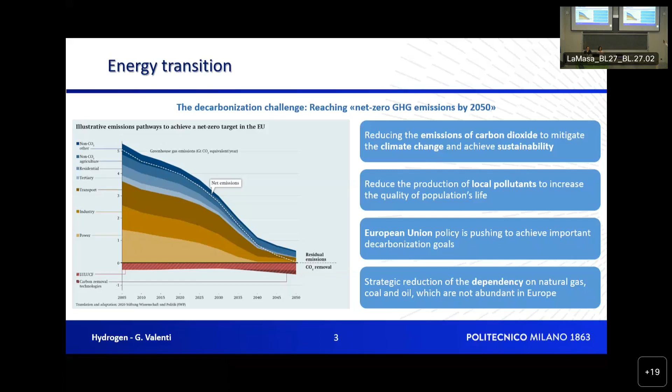I work in the hydrogen sector. I believe hydrogen will be part of our life in 2030, 2040, those years, not tomorrow. However, I strongly believe that the major character of the energy transition is electricity. Electrification of processes is the answer number one to decarbonization. Electricity is produced from renewables readily, use it.

We will see that the energy used in 2050 at the final point of use as electricity will be more than 50%. More than 50% is still not 100%. And why is that? When electricity is produced from renewable sources, it does not necessarily mean it's the moment in which users require it. There is not only an imbalance throughout the day, there is a strong imbalance throughout the seasons.

So because we always are repeating that the electrical infrastructure needs to be balanced, introduce into the grid as much electricity as it is consumed, in order to keep frequency, in order to keep voltage. So I believe in electrification, but can it be a full electrification?

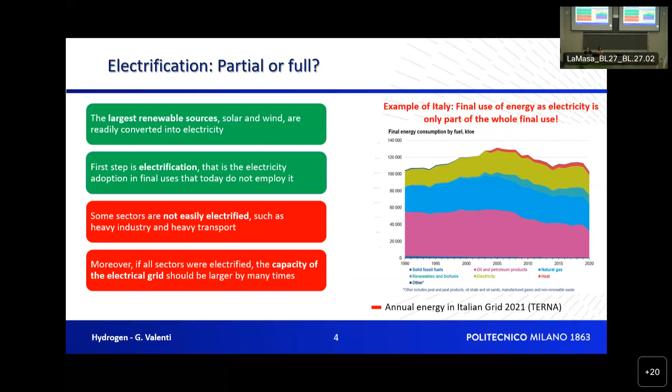Expensive. Transferring energy as a gas, as a gaseous fuel, or even better as a liquid fuel, is way cheaper. Way cheaper. So I believe electricity will be the character number one, hydrogen will be number two.

I don't believe in batteries, not only because of technical issues, but I don't believe in a world only with batteries. I believe in batteries, by the way, but let me complete my sentence. I don't believe in a world with energy stored only in batteries, because on top of the technical problems, batteries are bulky with respect to the energy they store, because they need, at least with today's technologies, tomorrow who knows, precious metals, and because there's a geopolitical issue.

The minerals, the metals that need to go into the batteries are concentrated in very few countries. If you complain about the geopolitics of fossil fuels, lithium is worse. Even more difficult. Mines are only in a few countries, and plants capable of processing the output of those mines are even in fewer countries. And those countries are not in Europe, for instance.

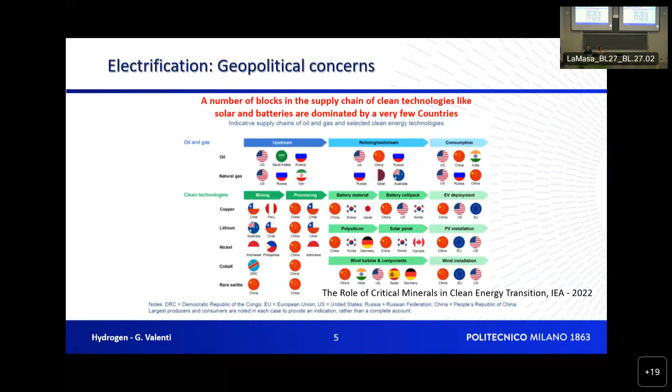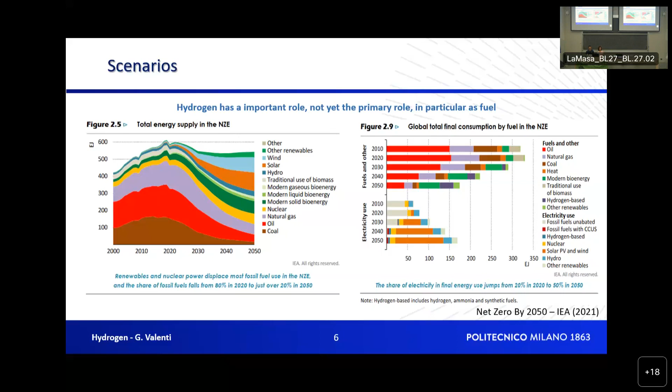And also I add, so the end use of energy is 20-25% of what? It's 20-25% of a huge infrastructure. So yes, electricity will be more than 50, hydrogen 20-25, but 20-25 of something big is big, okay? So this is where there's a lot of room for a number of people doing their work. And this is where I am, and maybe where you're going to be.

So hydrogen, quickly, because this is really fundamental things that I'm sure you know. Hydrogen is the simplest and smallest element. It's the most common, but extremely reactive. So as we always say, on Earth it's always bounded to other elements. Molecular hydrogen H2 is colorless, odorless, and non-toxic. So don't be careful if you breathe a little bit of hydrogen. You, Miguel, in our lab, don't be careful, don't be afraid.

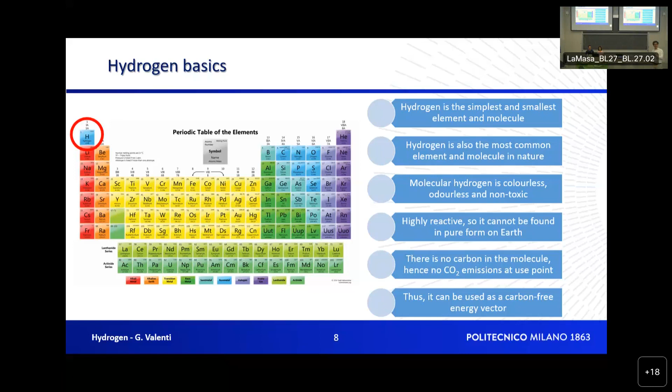But hydrogen has a pro and a con. It's really reactive, which is good because it makes the use of hydrogen easy, which is not as good when you want to design an extremely safe energy storage system. But it is like that. When used, of course, H2 does not emit any carbon of any kind. So it is the simplest carbon-free energy vector along with electricity.

There are multiple ways to produce hydrogen, but after all, we're looking at one color for the future. Very versatile - you can use it, transfer it, store it. Using it is extremely easy. You can produce it in a number of ways. It might be a little expensive, and importantly it's a chemical feedstock - hydrogen is the starting point for producing something else: ammonia, green ammonia, renewable ammonia, methanol, ethanol, just to name some other future energy carriers.

But it's challenging. It's small, it leaks easily, it escapes from pipes and systems way more easily than natural gas, so sealing is an issue. Very low density, so it is not as energy dense as fossil fuels like gasoline.

It's reactive, which to me is a good thing, but it raises issues because of its flammability limits - at ambient conditions, 4% to 75%, meaning it burns with little oxygen and also with a lot of air. So it really burns, but with no visible flame. When it burns, the energy is not emitted in a visible wavelength - you don't see it, you just feel that it's hot.

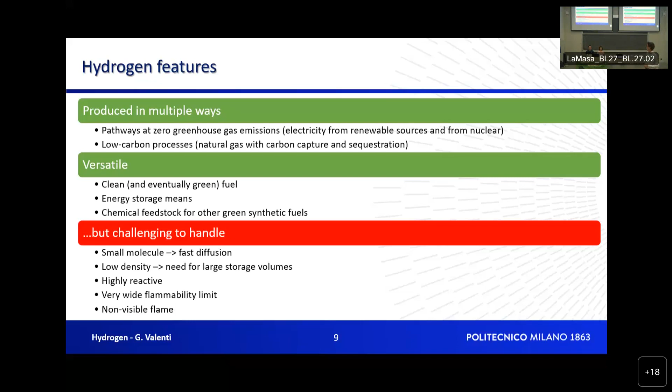But hydrogen, despite not being as energy dense as fuels, has some advantages over batteries.

In this presentation, you'll see the gravimetric hydrogen density - how much hydrogen a storage system contains in terms of kilograms of hydrogen per kilogram of the energy storage system - and volumetric density, how much kilogram of hydrogen is stored per volume.

This area is a desired area where the Department of Energy of the USA is putting money to get to in the future. But let's start from over here.

You see lithium-ion batteries, in terms of energy equivalent to hydrogen, are down here. The concept is lithium-ion batteries are extremely versatile, but they're bulky and heavy with respect to the energy they can store.

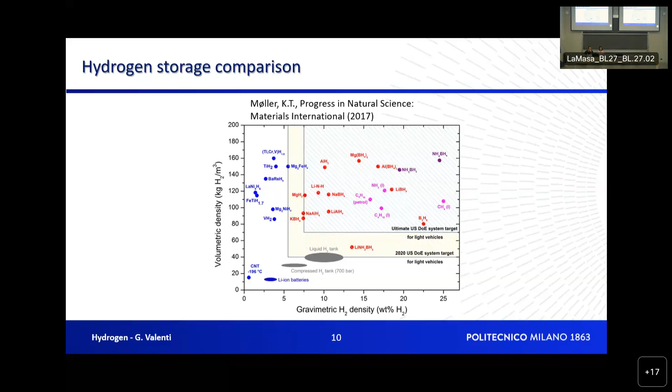And storing energy over longer times as hydrogen is way cheaper than doing it with batteries.

The hydrogen supply chain goes from production to end use, going through conditioning. We produce it in a number of ways - we'll see the colors in the next slide.

We condition it - once hydrogen is produced, likely it has to be compressed, at 700 bars, maybe even 1,000 bars. It could be liquefied, or it could be attached to something through hydrogenation, making a liquid organic hydrogen carrier. So we have to do something to this hydrogen.

Transport it by pipeline, by road, railway, ships. Store it - the good point of hydrogen is storing it.

If electrical demand could meet perfectly the electrical supply offer, we would not be talking about hydrogen - there would be no need for it. But this is not true, this is not true. The point is the fact that there is a mismatch over time and space between renewable energy supply and energy use.

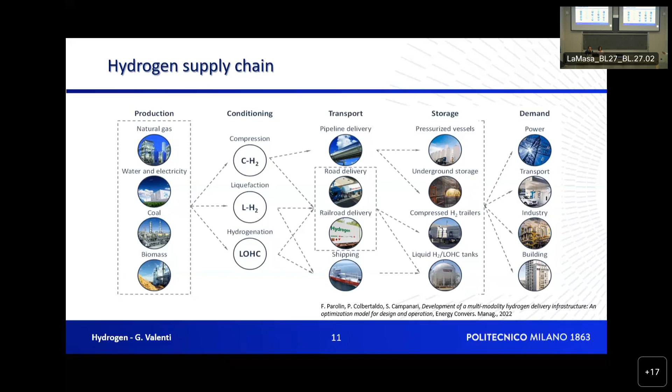How about the colors? There are a number of colors, not a unique way of defining color, but this is a common way. I would say the most interesting would be green, hydrogen produced from renewable sources - which doesn't mean zero CO2 emissions, because in a life cycle assessment you also have to think of the energy to produce the infrastructure, not only the OPEX of electricity, but everything. But it's minimal.

Purple - maybe not in Italy, but other countries really believe in producing hydrogen from nuclear sources. Nuclear power plants work nicely if they're affordable, if they work at 100% load always. So the idea is having these huge nuclear power plants producing, and when demand on the grid is low, that's when hydrogen can be produced. The nuclear power plant goes nominal, flat, 100% power output, and hydrogen production fills the gap with the grid.

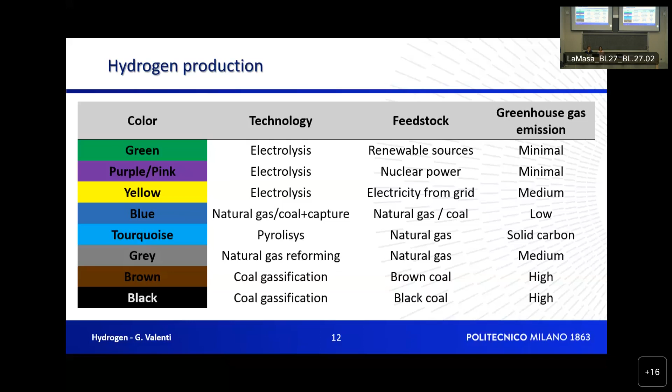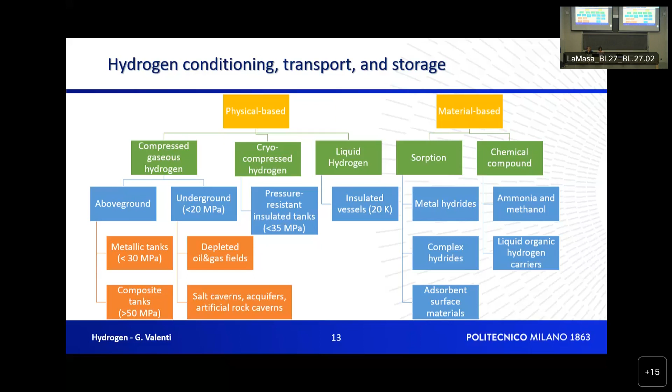Conditioning, transport and storage - you will see from the colors, when you have produced the hydrogen, there are a number of pathways, so a lot can be done. It could be compressed and stored above ground, compressed and stored underground, maybe in depleted gas fields, maybe in artificial man-made caverns. It could be cryocompressed or liquefied. This is physical conditioning or material-based conditioning, sorption, chemical compounds - a lot can be done to this hydrogen.

And then at the use point, you store it, use it for power generation, for mobility. That's a Mercedes truck - it's already working with liquid hydrogen. Of course it's a prototype, but that's not a mock-up or a concept. This is real.

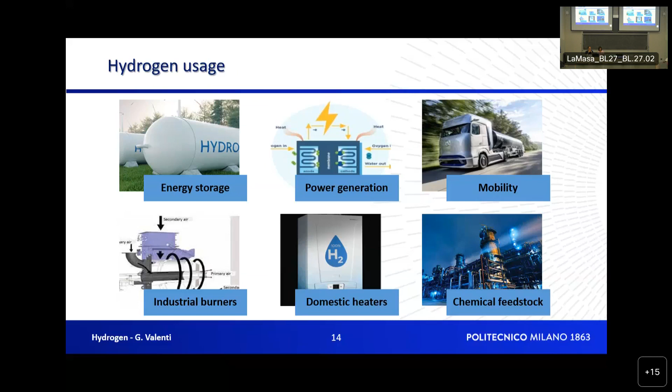Industrial burners in industry, for thermal applications. Domestic heaters - we're working on the development of a catalytic hydrogen water heater for households. So if you come to our lab, you'll see how we could use hydrogen with no CO2 and no NOx emissions to heat up a flat, and for chemical feedstock.

So the most common path of hydrogen is the so-called power-to-hydrogen. This is green hydrogen coming from electricity - I cannot say green with coal, I would say green with wind and solar. So power-to-hydrogen uses electricity to produce the hydrogen, stores it, and then distributes and uses it. This is the so-called power-to-hydrogen path, and you will read a lot about it.

And there's a lot of room for research in any step. In the electrolyzers, today there are electrolyzers, very common, but they still use precious metals.

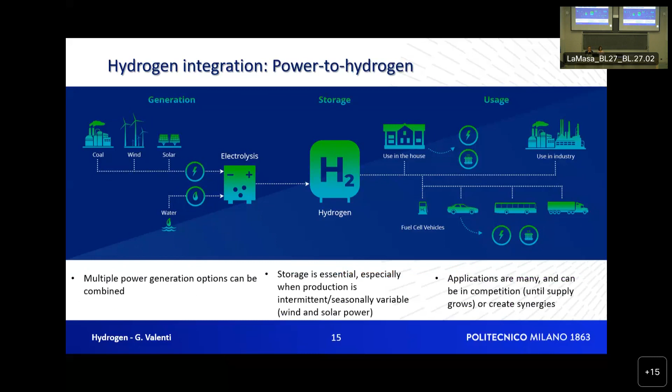So this really simple schematic shows a big world. Also, electricity and hydrogen are actually not competing, but they could cooperate. This is the so-called sector coupling. Coupling means putting things together.

Today, if you think of it, the electrical infrastructure is totally separated from the natural gas infrastructure. Maybe some electricity is produced from natural gas, but from the point of production to the point of use, these two are totally separated.

With hydrogen, they could start interconnecting, and from cooperation, good things can start. So also, an overall efficiency could be increased. It's a messy chart, but what I like about this chart is that everything is interconnected. You see arrows crossing.

So energy will be used as electricity, as natural gas, as hydrogen-based fuels, and because most of the hydrogen will be produced from renewable electricity, they interconnect. Again, one sector can help the other sector. It's more complicated, of course — integrated systems are more complicated. They will have to be governed, controlled, but typically integrated systems are more efficient.

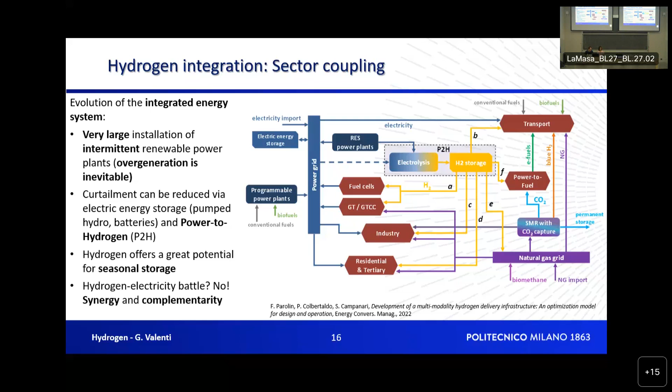Timeline — when is it going to happen? The hydrogen market today is, I wouldn't say zero, but almost zero. Today there are consolidated hydrogen consumers, so there is a hydrogen market, but this sector is not an energy sector — they don't use it for energy purposes. The new sectors that use hydrogen as an energy carrier are power generation, transportation, and everything we've seen before.

But the good part here is that you'll see how the Hydrogen Council, which is a European entity dedicated to hydrogen, foresees the deployment up to 2050. And you will see that some arrows start earlier, some other arrows end up later.

For instance, ships and airplanes — we're talking about the first hydrogen airplane flying in 2035. You'll see Airbus; the project is 2035, and they might go beyond that, but this is because they have to go through a lot of approvals. So the deployment is spread.

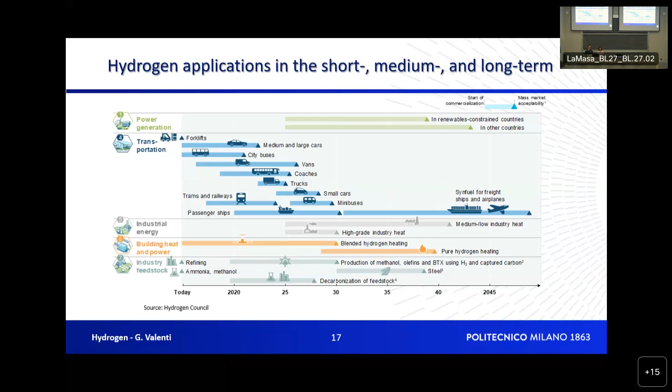Among all applications, I would like to focus on liquid hydrogen — not just because I did my PhD on it, though that is important to me, but because it's highly technological. In my opinion, it's super, super cool. So, why is it super cool?

Well, hydrogen has this unfortunate characteristic of being liquid at 20 Kelvin — a little cold.

And liquefying hydrogen, from a point of view of energy usage, is expensive — 16 kilowatt-hours per kilogram of liquefied hydrogen. I would say more like 10 than 16; 16 is for really small plants. But look at the energy requirement for producing hydrogen from electricity: 50. So, hydrogen at 30 bar is 50 kilowatt-hours per kilogram, and liquid hydrogen at 20 Kelvin is 60. Not a big difference — 20% is not nothing, but it's not much. It's not what we call a showstopper.

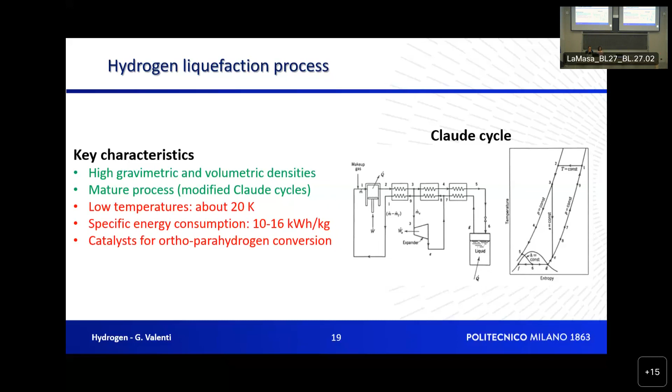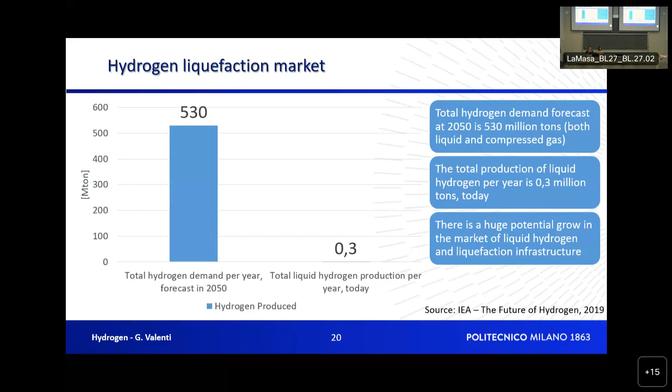But why would we do hydrogen liquefaction? Because there are some important applications. The International Energy Agency says by 2050 we will use about 530 million tons per year of hydrogen, only 0.3 million tons as liquid — not big, but look at what it's used for. This, in my opinion, is the fascinating part.

Flying objects, not only rockets but also airplanes. Airbus is designing its liquid hydrogen airplane for 2035. Airports are already thinking about how to produce and liquefy hydrogen on-site and transfer it to airplanes. This sector is already working to be ready by 2035. It's working now.

Then, something that feels like science fiction to me: countries and continents can become energy exporters. Take Chile — it has huge potential for renewable energy, wind in the south, sun in the north. They could produce liquid hydrogen and ammonia, green both, and deliver it to the world.

Australia, same thing. There's already an ongoing project between Australia and Japan, with a cryogenic ship for transferring liquid hydrogen from Australia to Japan. Australia has a lot of renewables producing electricity, transferred to Japan — a beautiful country but with a small area.

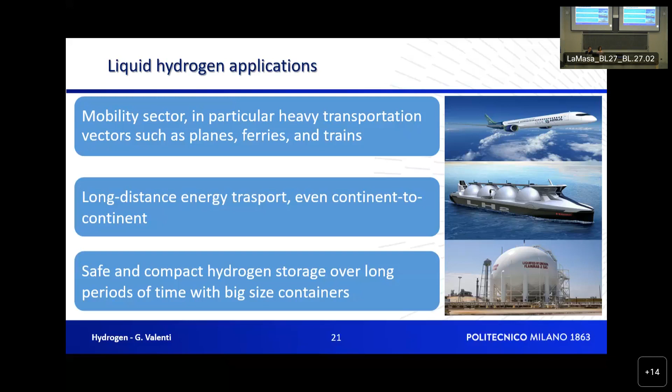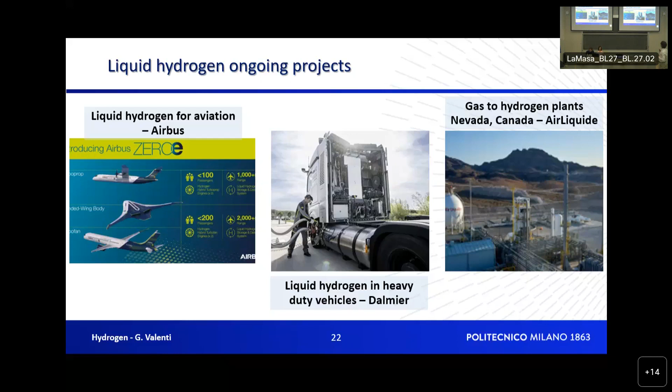Here are some images — this is the same truck as before, from front and back. This is the Airbus idea. This one I don't remember, a liquid gas to hydrogen plant in Nevada, Canada. I have to check that, Nevada, Canada sounds wrong — maybe there's a Nevada in Canada, but I'll double check.

Now, what is Politecnico doing? We're working in the labs — you go to the mechanical engineering department, the chemical engineering department, the management engineering department, even design, of course energy engineering. Who am I missing? They all have ongoing projects on hydrogen, so whichever department you go to, you'll find research groups working on it.

But the university has something bigger than departmental projects — an initiative with companies called the Hydrogen Joint Research Platform, where companies and Politecnico do research together, sharing the efforts, sharing the risks. You'll see that having companies work together is not that easy, but here we have 15 companies working together. This is the initiative — I'd say believe in it.

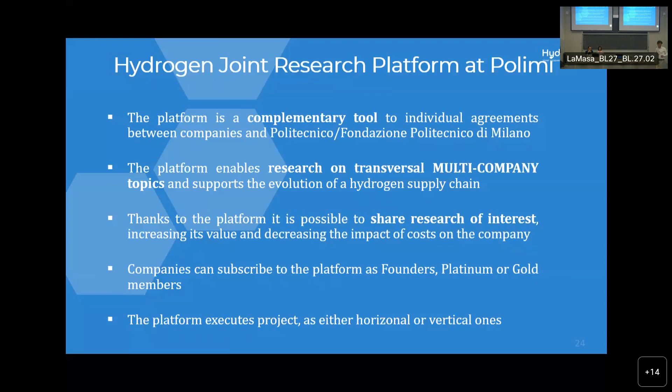I always smile in a sad way when I look at 2050. By then I'll be retired for 3 years. So when I talk about 2050, what will happen? I'll be one of those guys at the bar with the newspaper. It's a little bitter taste, but that's okay, that's what happens — it takes long, I won't professionally see the end of it.

Hydrogen will have an important role, not the primary one — electricity will. If you want to do electrification, go for it, there's a lot of room, amazing also over there, it's an answer. If you like hydrogen, stay with me; if you like ammonia, there are other friends doing it. Hydrogen will be crucial in areas where electricity is not useful or difficult to store. Liquid hydrogen isn't number one, it's not the lion — it's a little cat. But still very fascinating because of the technology.